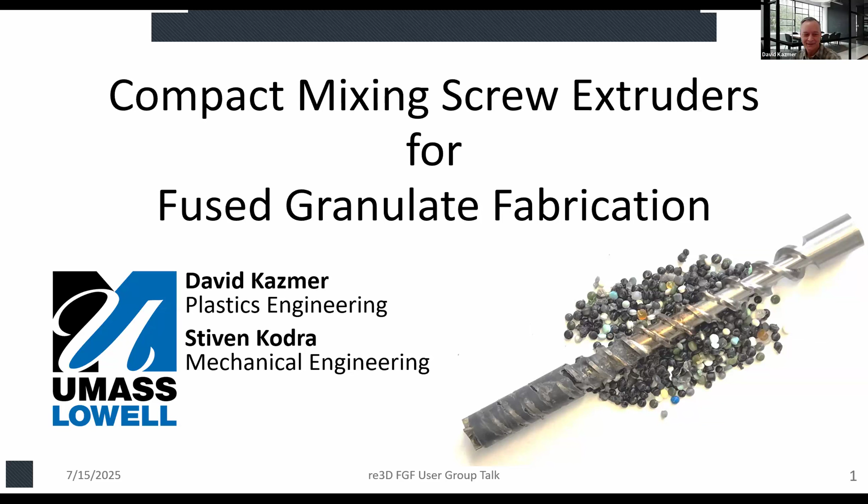All right, let's go on to the next slide. So there's slide numbers. If people want to write down questions, we can reference the slides at the end of the talk. We're going to split the talk in halves, and I'm going to talk about what I've led in the last year, and then Stiven's going to talk about what he's been doing the last 6 or 8 months and going forward. First, I'm going to talk about fused granulate fabrication a little bit and some broad overview of plasticating screws. And then I'll talk about these mixing screws. And that's where Stiven and I are going to switch out. So the next slide then.

All right, so FGF, we know what the strengths are, right? We want it to be cost effective, and there's a rule of thumb in the plastics industry that anytime a person touches a pellet or a material, the price of whatever you're selling needs to double in order to rationalize the fact that you added the value. So pellets are roughly 5 times cheaper than filament, and that's a big motivation. The material variety is also a big deal. There's a lot of pellets available, and the potential to add colorant and do inline compounding with FGF, if we could achieve that, would be a real game changer.

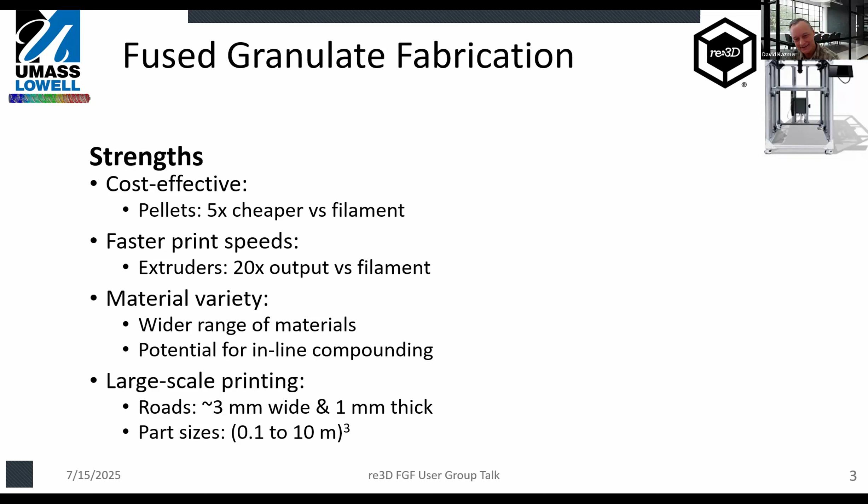Faster print speeds, a big deal, right? Typically we're looking at grams a minute on a fast 3D printer. With FGF, we're looking at kilograms an hour, so tens or hundreds of grams per minute. And then obviously also large scale printing. So the next thing though, the issues, if you can just hit advance. Yeah, these weaknesses. The big one is this lack of output control. How much volume you get out per step of the motor is a big deal.

We need to be able to assure what's the width and thickness of your road as you're extruding and control it well. And then with the extruder, we're also looking at large extruders that might have a slow response and might drool, and all that gives us limited resolution. So what we're seeking to do is address these things by shrinking the size of pellet extruders, right? That's what we're about.

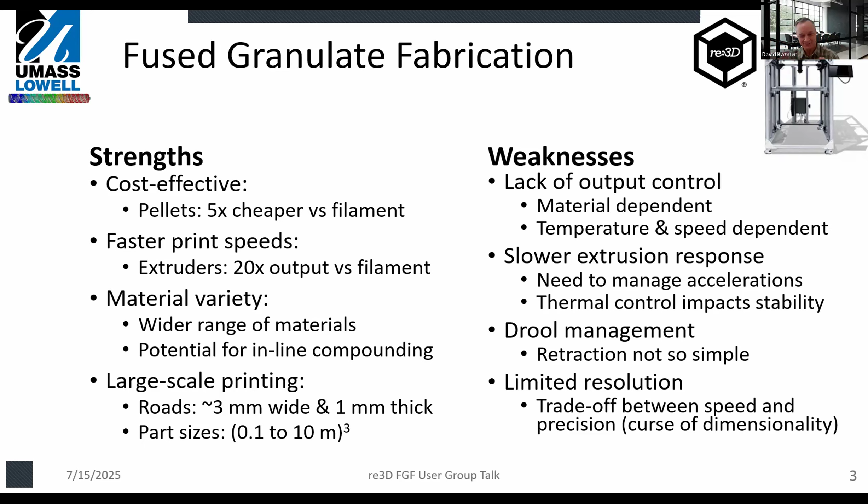And so this is actually very counter to the current trends in the industry. The long-term trend in the industry over the last 30 years is to go to longer and longer screws. About 100 years ago, screws were on the order of 10 to 1 length to diameter ratio, and then they kind of stabilized at 20 to 1 about 20 years ago. And in the last 5, 10 years, they've just gone up to 30 to 1, even 40 to 1 length to diameter ratios. And the reason is that the longer your screw, it turns out you have more residence time. And that allows the melt to really develop, and you have more time to melt, process, and mix everything. And so you can add devolatilizing zones and all these things.

The problem is, as you get longer and longer, you have more and more mass, right? Longer residence times, which actually aren't necessarily good, and your energy efficiency goes down. And so these are really unsuitable for FGF. And what you're looking at here on the bottom, that image is actually a general purpose screw that I designed for a standard extruder that we did a ton of characterization on. So go on to the next slide.

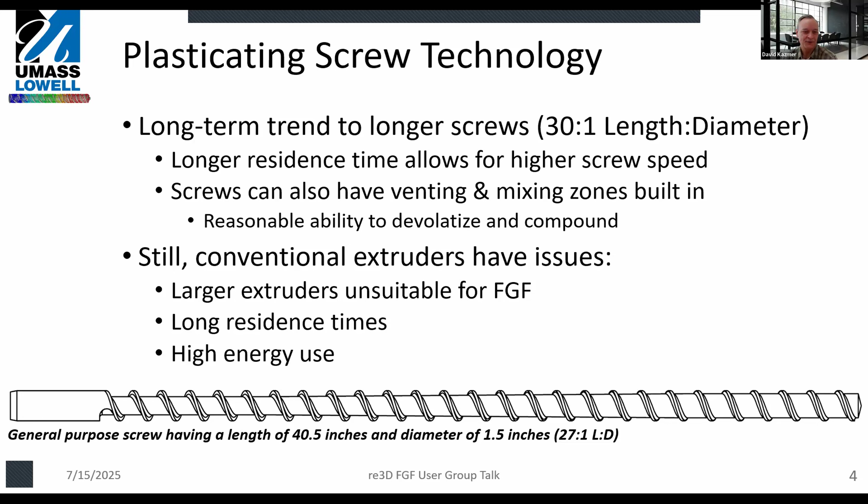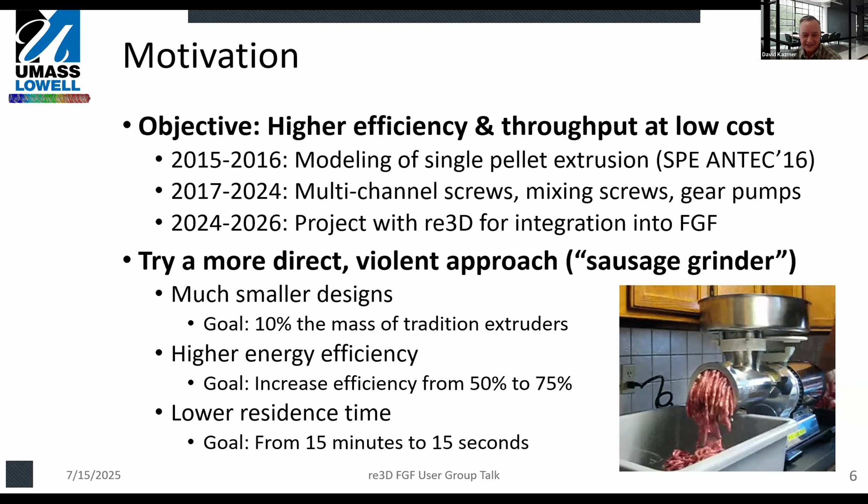At any rate, it's double flighted, and the reason it's double flighted, there's lots of reasons, but the main one is I'm sticking these mixing slots on there. And by having a mixing slot, we're going to cause some of the material to go over the flight and break up the solidified bed in the next flight. And then the reason we have that double flight is the one that follows, it turns out, is going to wipe the barrel. And that function of wiping the barrel is super important, actually, for 2 reasons.

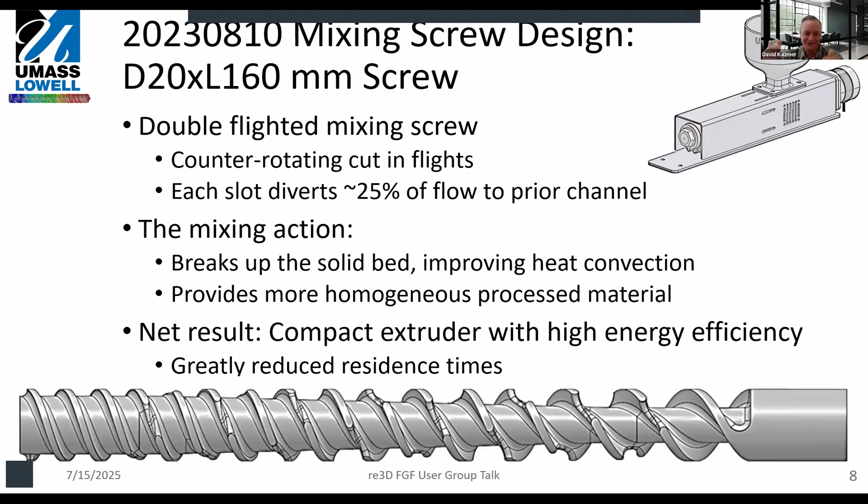One, by wiping the barrel, we avoid residence time and hangups, right? We need everything to be clean. But the other thing is that the material on the barrel is basically melting by conduction. And so by doing this, we're actually getting good activity and lots of shearing between the melt in the channel and the temperature of the barrel. So that's pretty cool. So yeah, we have a very short thing. Let's see if it works, right? So let's go on to the next slide.

So these are just some of the design details. What I've tried to do is design these channels. So it's actually a thing called a variable pitch screw. And what that means is that in the feed section where the channels are deeper, the pitch is actually wider. And then as you go over to the right, where the channels are shallower, the channels are narrower. And the reason is we're maintaining a 4:1 aspect ratio, basically, of the channel width to the channel depth. And in doing that, we're going to have efficient recirculation of the melt, and we avoid these long, slow, solidified beds that will tend to propagate down the screw channel. So yeah, we're all about breaking that up, okay?

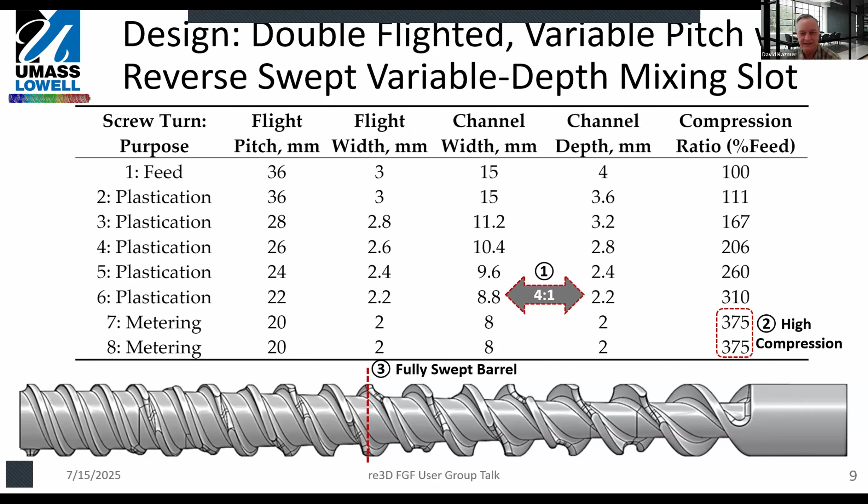And then the other thing we're doing there is high compression, right? So a typical general purpose screw has a compression ratio on the order of 200%, 2:1. This is a 4:1 design, but we are relieving that compression by having these mixing slots. So as the pressure develops and there's too much stress, the pellet's going to want to go back over that flight and work on breaking up the solidified bed. So it's true, by having those mixing slots, we are going to have slightly longer residence time, but we can counteract that easily by increasing the speed of the screw. So it's not about just having so much volume per rotation of the screw, but also enabling that screw to rotate faster. So those are some of the things we're looking at. All right, so the next slide.

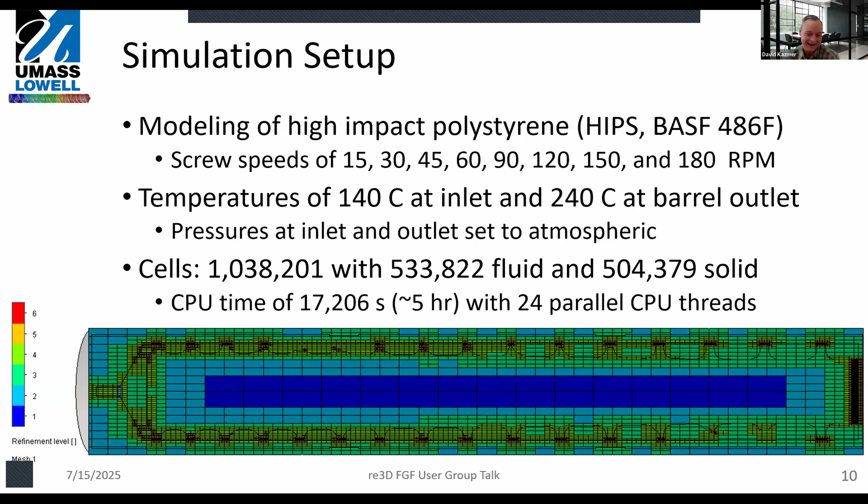So we did modeling, and Steven's done a lot of modeling too, but our current modeling is very similar to this, so we'll just focus on this, which is published. Here we're looking at a cross-section of the geometry, and we're just showing the mesh resolution density across the screw. We can model something on the order of 1 million volume cells. In this case, it's a roughly 50-50 mix between fluid and solid, and it takes about 5 hours on a computer with 24 parallel threads. What we're doing is the inlet's 140 Celsius, and the barrel is set at 240, and we're going to see what the flow rate and temperature are as a function of these different speeds. All right, next slide.

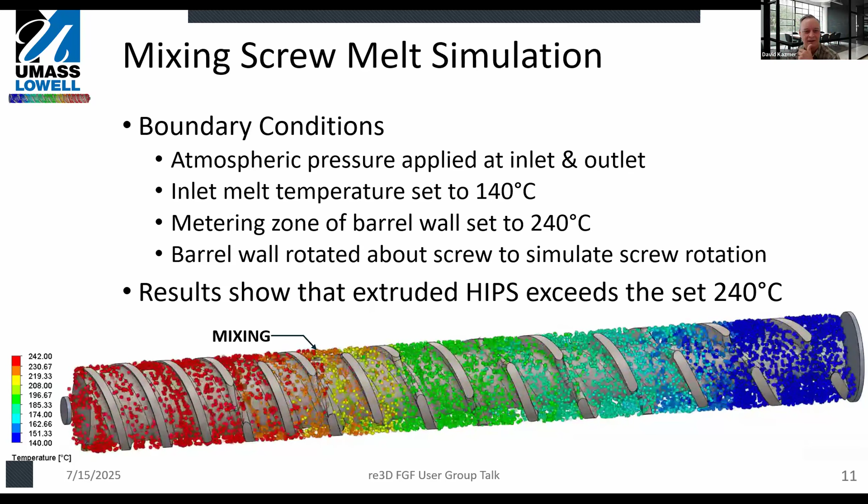And if that cold material were to reach the end of the screw, basically you could be seeing solid pellets and very inconsistent material being extruded from your extruder. In industry, people really run these things fast and hard, and we do see those types of defects, and I've seen it as well. But not here, okay? We're still relatively slow, but things are good for us. You'll see some of the results now.

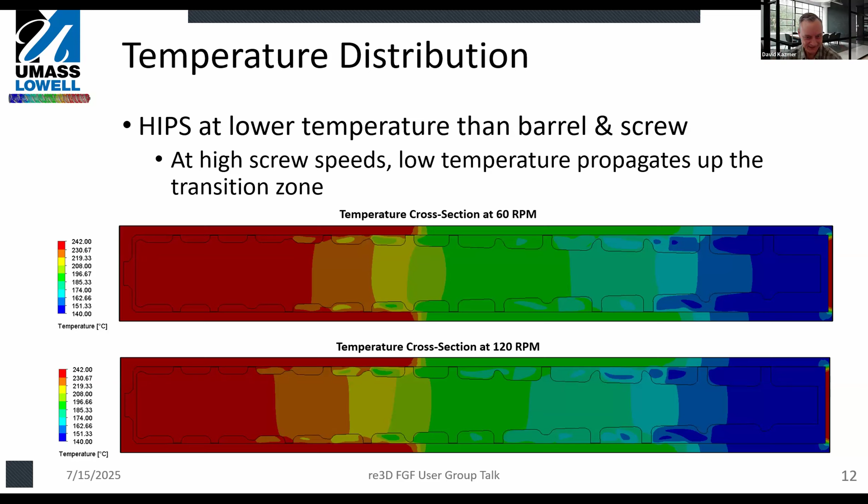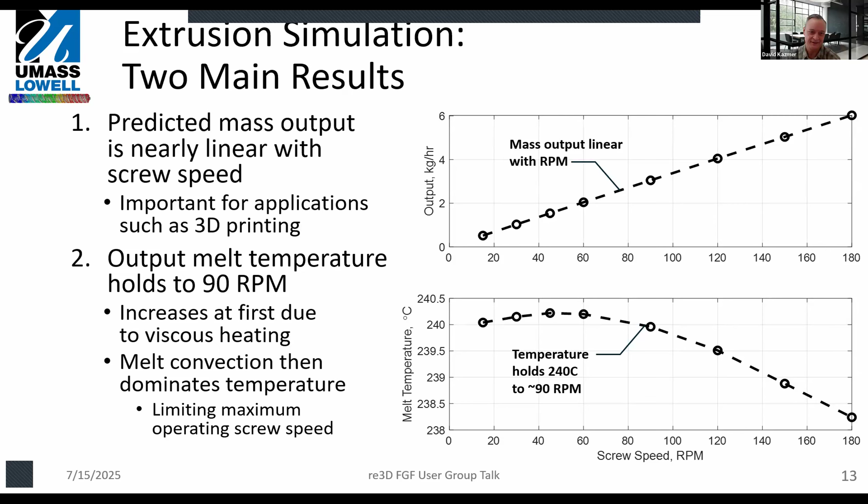And then on the bottom, what we have is the melt temperature as a function of screw speed, and it has this interesting U-shaped behavior where as you start spinning the screw faster, you actually get an increase in melt temperature because of shear heating. And then at some point, you start getting the screw going so fast that the material coming out doesn't have time to heat up. And so the material actually cools down the faster you go. So this really limits the operating rate of your extruder. All right, the next slide.

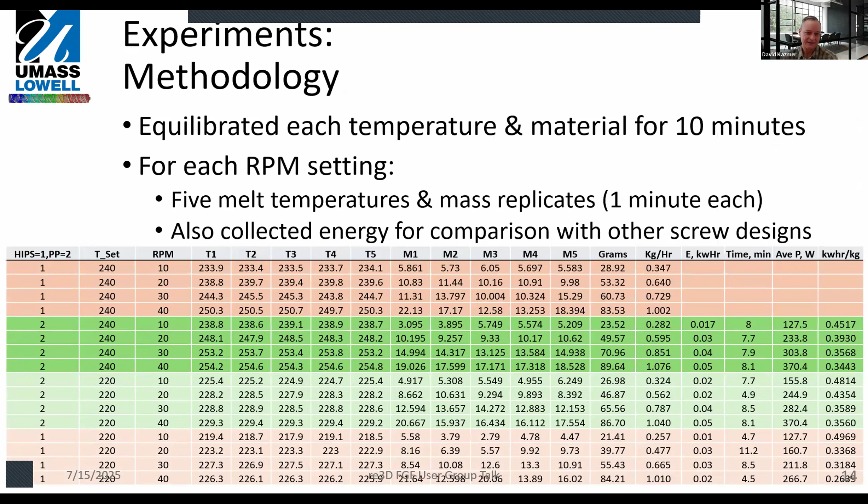So we did a bunch of experiments. Now we're looking at actual quantitative data. What we're doing typically is running high impact polystyrene and then polypropylene in this setup. We're looking at 4 different screw speeds and 2 different temperatures. We're measuring the temperature of the extruder coming out, as well as the mass flow rates. And then we have some plots. I think we have an animation coming up, or a video.

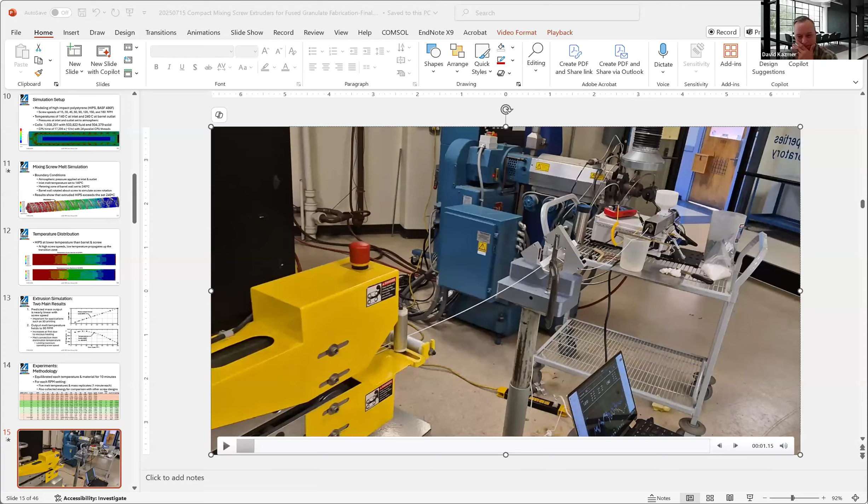Yep, hopefully it'll run. Oh, so Steven, it's not running on ours. It's not running on mine either, yeah. Oh, hold on. Anything? Can you see it on yours? It's not moving on my end. Oh, it's tough. I think that might be an issue. Do I stop the share real quick and I'll start mine? Okay. I'll share just this window. Hopefully you'll be able to see it. Can you see the screen here? Yep. Do people see this, Steven?

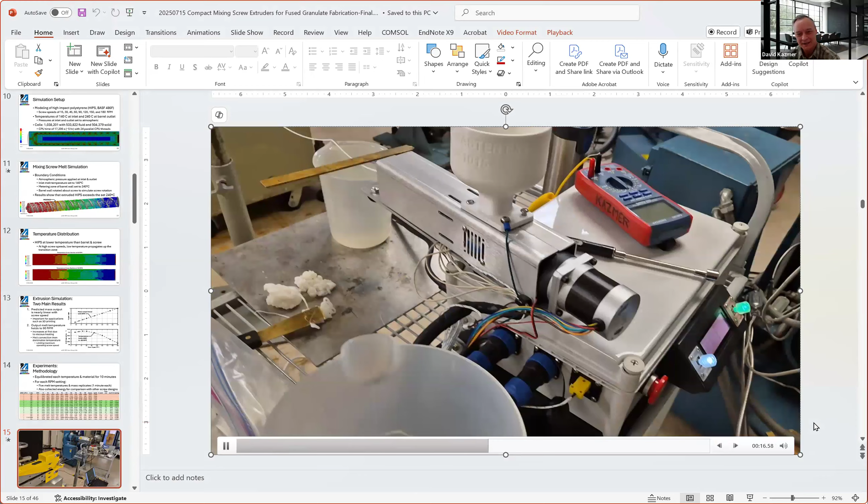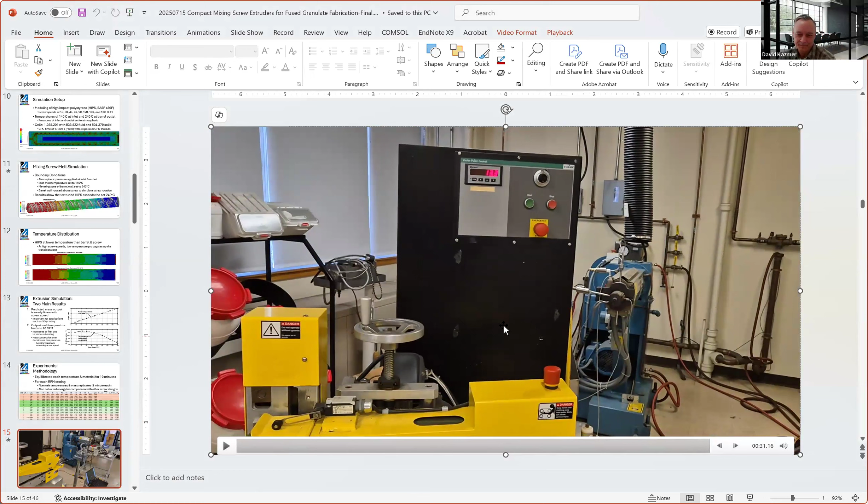Yes. Yeah, so this is a little setup I have here. This is a 20-to-1. We're pulling the material at a couple of feet per minute. It's going through a laser micrometer right here. So this is literally day 1. Those are the takeoff diameters that you'll see there. We'll run one more time. I think it's 13 feet a minute, so it's going pretty quick. And the diameters are on the order of 1.8.

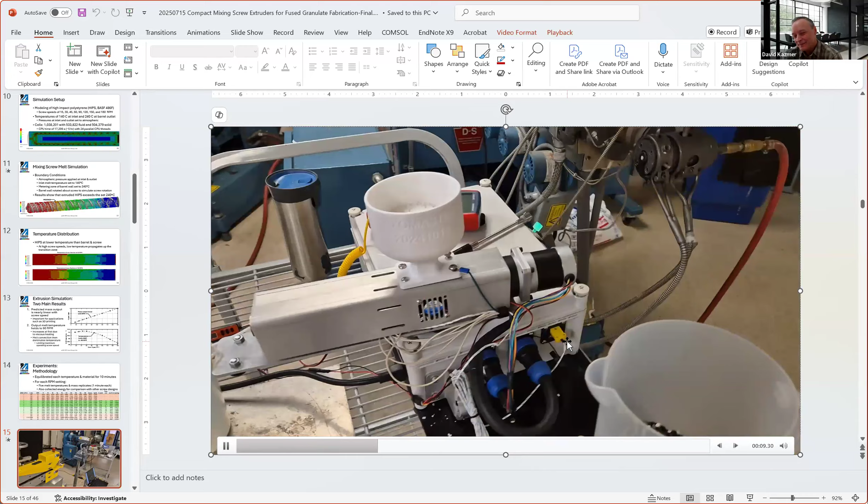Because I didn't actually expect it to work, I just used this clunky water bath. You can see how the water bath has that brass rod there. So you have this stick-slip phenomenon, which is tough, but we are extruding the high impact polystyrene in this case, if people follow that.

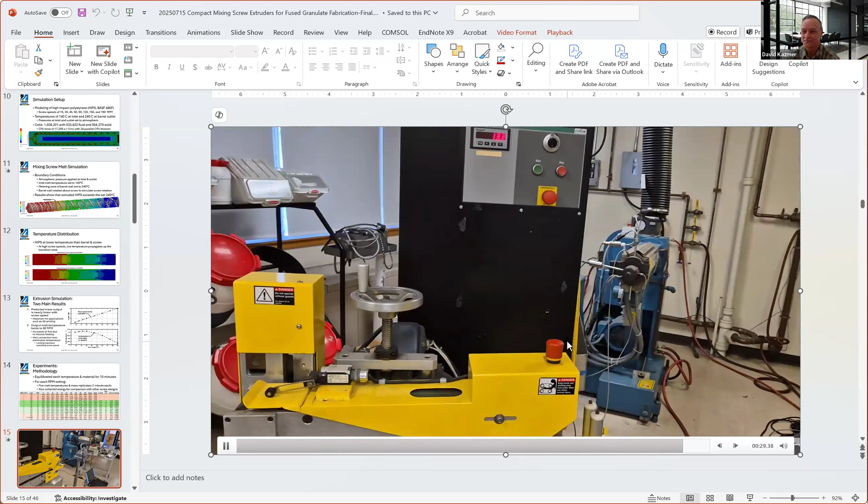So I'll stop my share and then you can pick that up if you want us to restart your share.

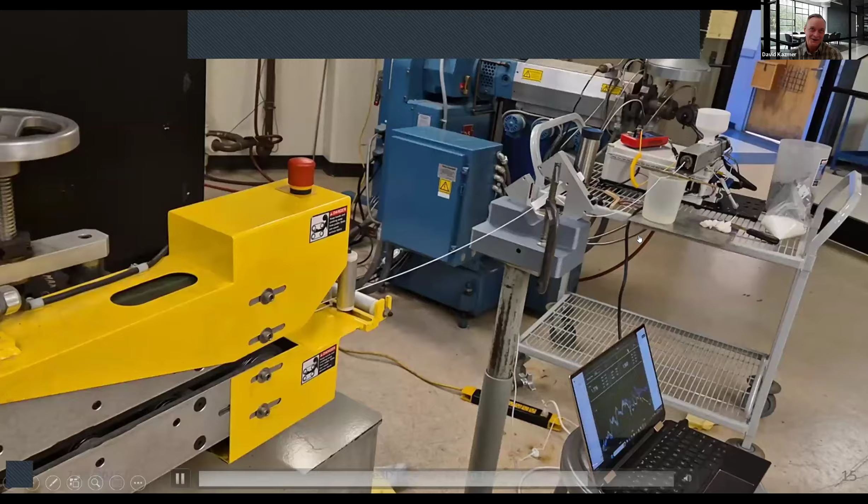So that was the very first day where we ran this thing. And we were pretty excited. And the reason I did all this was I've been working on it for 10 years. And we were entering this project with Re3D, which we're going to talk about in a few minutes in more detail, wanting to de-risk the project. I didn't want to promise stuff that I didn't know we could deliver. So what we have here is

basically a screw pull. And the material that we ran was not only the high impact polystyrene, but also this mixed polypropylene, post-consumer polypropylene. The different colors here actually represent slightly different grades of the polypropylene. And there's also polyethylene contamination in here. So you can imagine that the materials are coming from different sources: carpet, car bumpers, all these different things, plastic chairs. And so what's remarkable is that by the time we come to the end here, you can see how well mixed the material is.

So the melting doesn't really start until about a third down the length of the screw. And so that's all interesting and important. And then the other interesting takeaway is that this is a 20 millimeter screw. Those pellets are actually quite large, on the order of maybe 6 millimeters in diameter. And yet they process pretty well. All right, so I'll start wrapping up my part by looking at some comparative results and then hand it over to Stiven. So the next slide.

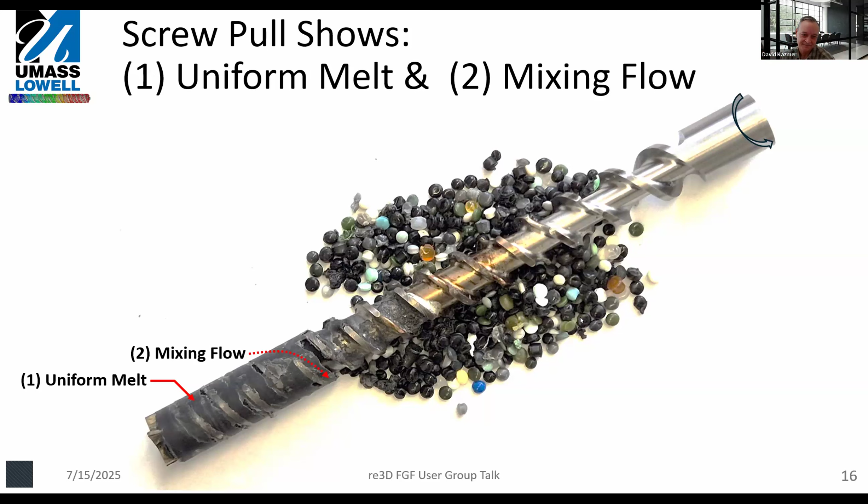All right, so what we're looking at here is comparisons of our experimental data against the simulation results that I showed earlier. And the mass output, the graphs on the right, are really the most important stuff. The words on the left are just support. But the mass output generally is very linear, but we're less than what the simulation predicted. And the main reason for that is because in the simulation, we're predicting a fully dense melt channel, where in reality, in our extruder, you have this compacted bed of pellets, and there's air in there and whatnot. And so the density that's propagating forward with the screw rotation is reduced. So we're about 2/3 of the prediction, which isn't bad.

Then looking at the melt temperature, what's interesting is that we only simulated 240 Celsius. And we did 2 different experimental runs, one at 240 and one at 220. What's interesting here is that when we run 240, you can see that we're actually increasing the temperature quite a bit more than the simulation predicted. And likewise, at 220, you start out slow, it's very close to 220. And as you increase the speed, the melt temperature also increases above the 220 quite a bit. The main takeaway is that this data suggests that we could run faster because we're still well above the target temperature. In our case, though, we had a 50-to-1 gearbox that really limited our speeds to 40 RPM. And so for that reason, we physically, in this setup, couldn't do that. So we didn't go above 40 RPM.

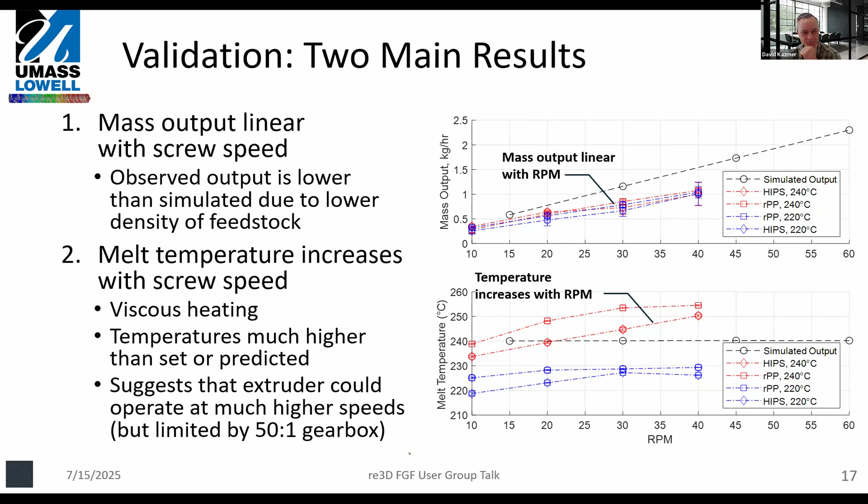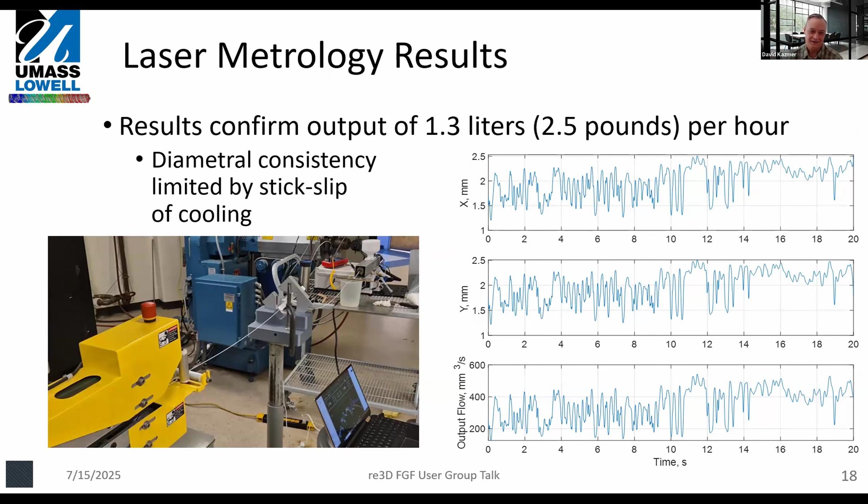All right, I think I have only maybe a couple more slides. What's interesting, looking at the laser metrology results, you can see that there's a lot of variation here down the length. Most of that is really due to the stick slip coming off that brass rod in the water bath. The main takeaway, though, is that we really were around 2 millimeters in diameter. And given the takeoff speed, this confirms that we were about 2.5 pounds an hour on this tiny little extruder, which is pretty cool. Okay, one more slide maybe.

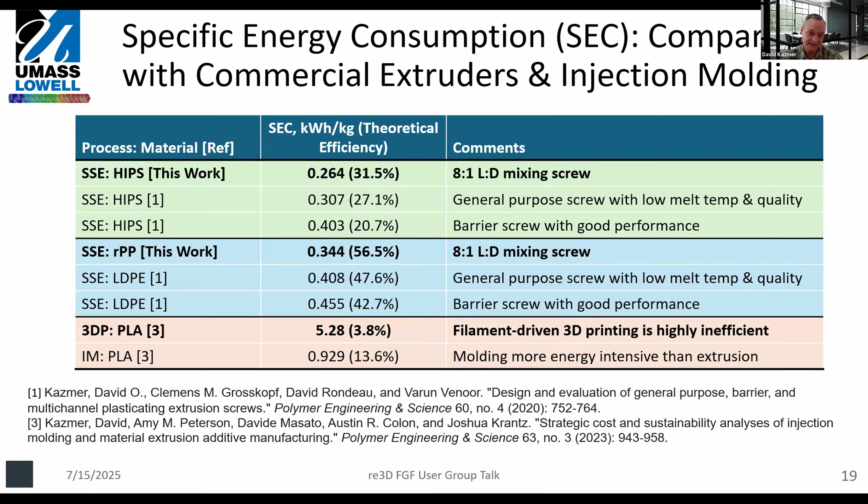We can skip this one. So efficiencies were on the order of 50%, whereas in these large extruders, we're talking industrial scale things, they're closer to about 40%. So that's pretty cool. All right, so this is my very last slide.

So what we found from the preliminary work is that the mixing screw was impressively robust. Even with this recycled polypropylene material, the energy efficiency was great. The residence times were looking good. And so where we're handing it off now is the last 8 months or so, we've been working on scaling it up to the larger size. And then looking at instrumentation, and then also characterizing some stuff on residence time and how the material's melting in the screw. So Stiven's going to talk about this stuff now, and then what our future work is.

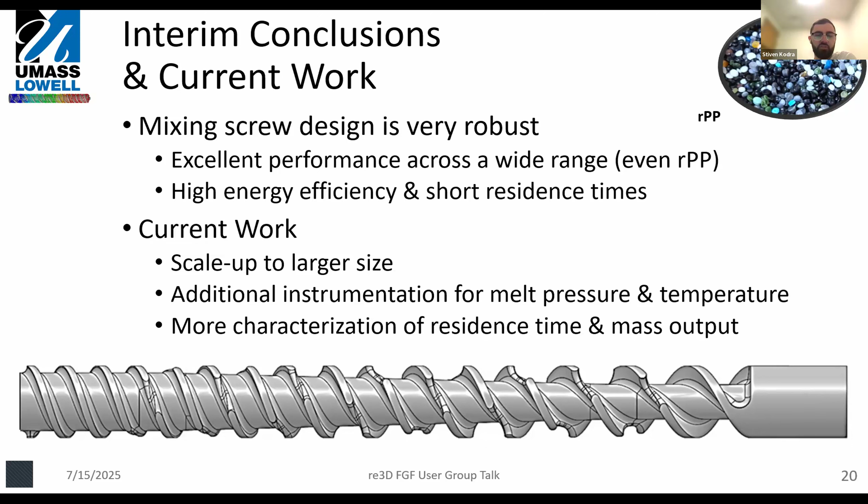Okay. So as Dr. Kazmer mentioned, we essentially took designs and learnings from this screw and applied it to a slightly larger screw. From that 20 millimeter screw that we talked about previously, we sized up to about 31 millimeter diameter. We still kept that 8:1 L to D ratio and took a lot of learnings from the old screw design and applied it here, where we have two feed sections or two turns that are feed sections.

This allows for more constant feeding. And then again, we start that long transition zone where we're constantly increasing the compression ratio each turn of the screw. And again, also incorporating these mixing flight designs that achieve nice flow and mixing within the variable recycled pellets that we see from the processing.

Another upgrade to this larger diameter screw, to get more data, we incorporated an instrumented nozzle into this extruder, which incorporated a pressure transducer up to 20 megapascals, as well as a melt flow thermocouple to get a more accurate reading on the extrudate. Similar to the smaller screw, we ran a total of 5 replicate experiments extruding for a constant amount of time, getting samples every 60 seconds to determine the total mass flow output. This was done with varying screw speeds as well as variable barrel temperatures.

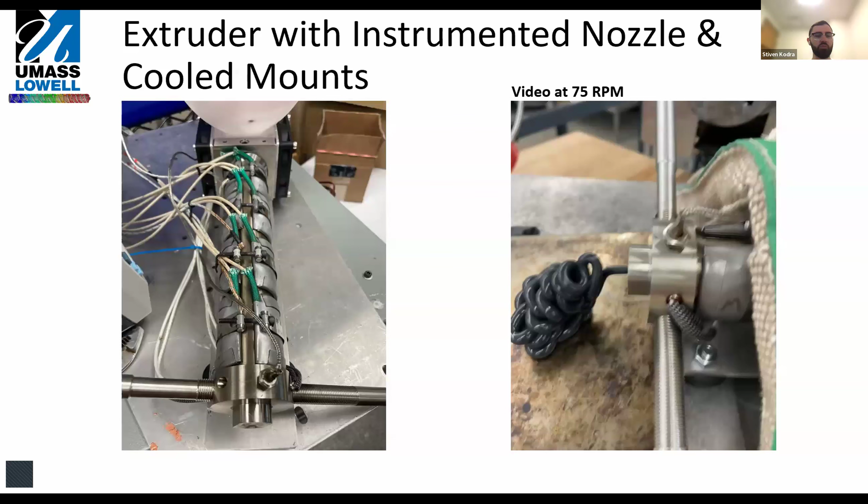So here's a video. A lot of these experiments were run in the horizontal position as shown on the left image here. And this is the extruder setup. We have 4 heater bands on there, and then you can see the instrumented nozzle with both the pressure transducer as well as the melt thermocouple in there. Then here's a video. It's a little loud, but here's a video at 75 RPM. You can see the extrudate just coming out of that nozzle while we were recording some data samples.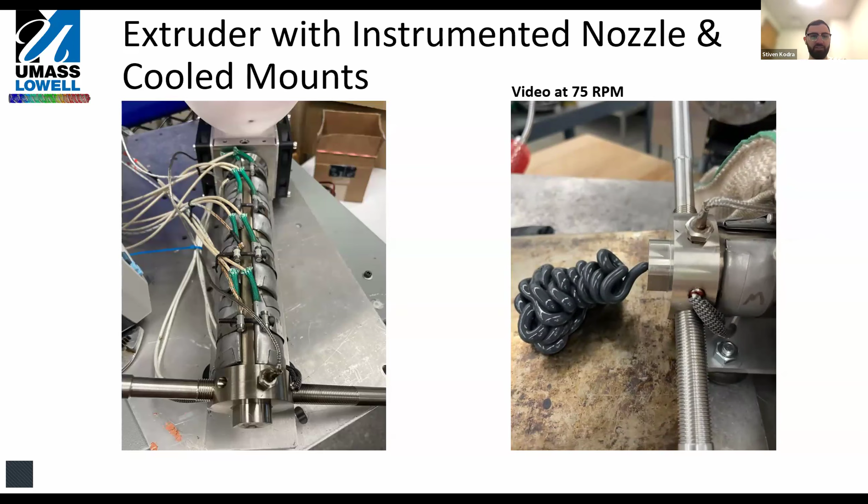You can really see the quite stable pressures pushing that extruded mass out. You do see a little bit of die swell, but that's something that can be characterized. So looking at the data here, we collected 3 charts for each of the experiments run.

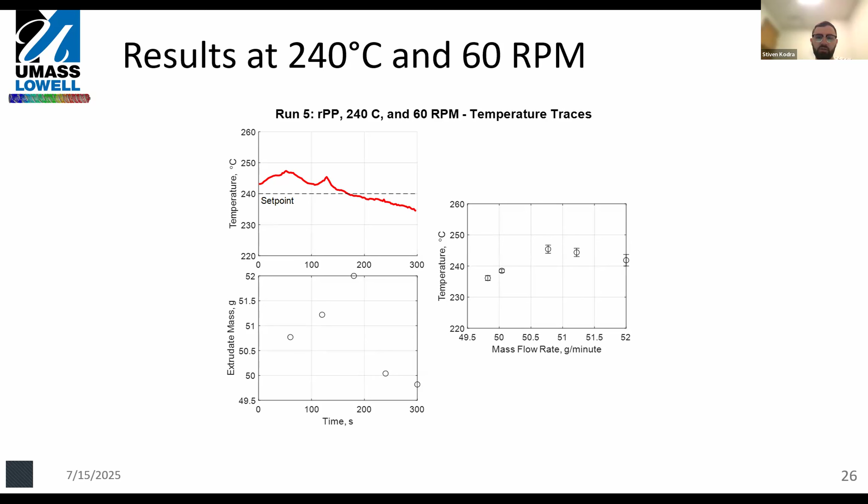And then we looked at variable temperatures as well. So here we went to 240 degrees Celsius, again a uniform temperature across the whole barrel and screw, and an RPM of 60. Again, we see that shear heating at the beginning quite high. The set point was 240, we get to about 245, and then through these continuously long, about 5 to 6 minute tests, we do see a drop off in that temperature just because of the residence time. Again, we see some variability with the extruded mass output over time, but it still hovers around that 50 grams per minute set point.

So with all of this experimental data, we ran some linear regression models looking at the mass output and the effect of screw speed. This linear regression model shows a really strong correlation of the screw speed as a function of mass output. We're seeing about a 0.8 gram increase in extruder output for every increase of 1 RPM. The temperature had a little bit less of an effect, but still counted towards some of this data that we pulled from this regression model.

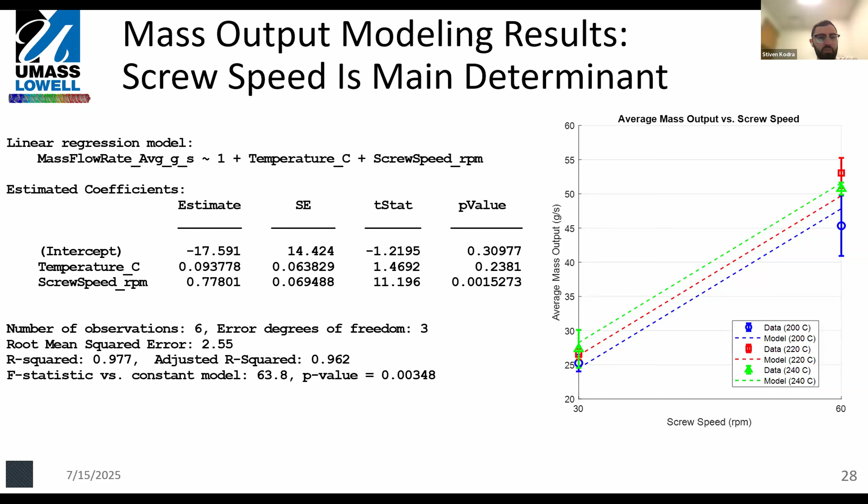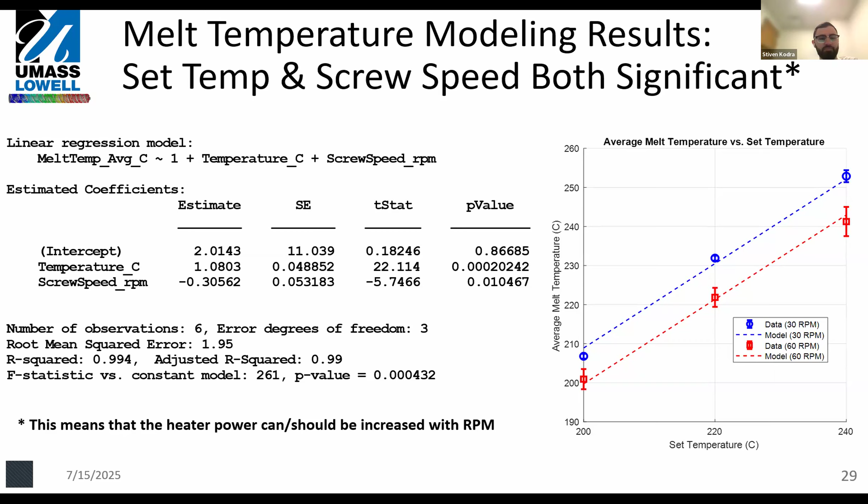Because this application relates to 3D printing, a lot of my experiments were done in the horizontal position, as previously shown. We wanted to make sure that we're not seeing major differences in the orientation of the screw. If you're following pellet extrusion, you've probably seen some of these screw extruders on robot arms moving at various degrees and orientations. So in order to get a rounded data sample, we ran the screw at the horizontal position, and then we ran at 45 as well as 90 degrees.

Here are the results for the 45-degree angle test. This was run at our data center point of 220 degrees Celsius and 30 RPM. And again, we saw a slight increase, but nothing too significant when alternating to the 45-degree angle. Again, the 3 charts here show the melt temperature as well as the extrudate mass over time.

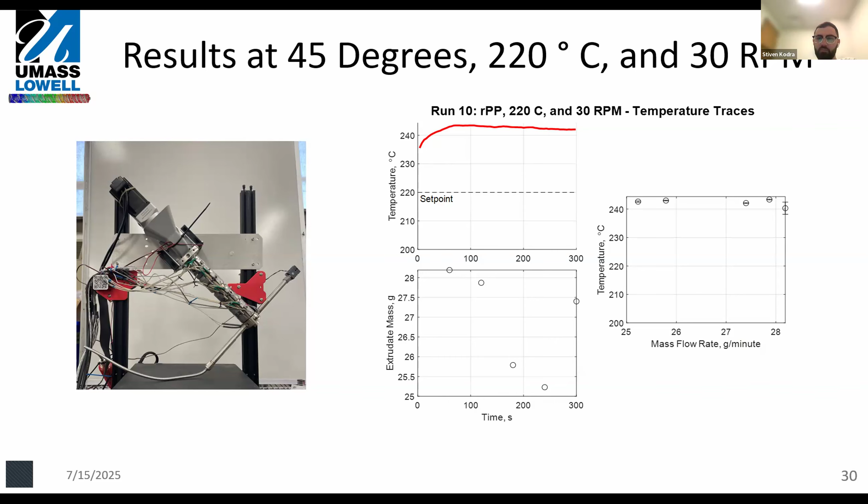Here are the results for the vertical test, 90 degrees, which is the most common setup that I've been seeing. Very stable at that lower speed of 30 RPM. We see very stable extruder melt temperature, and we see a little bit of variation in the extrudate mass, but uniform when we plot it against temperature and the mass flow rate in grams per minute.

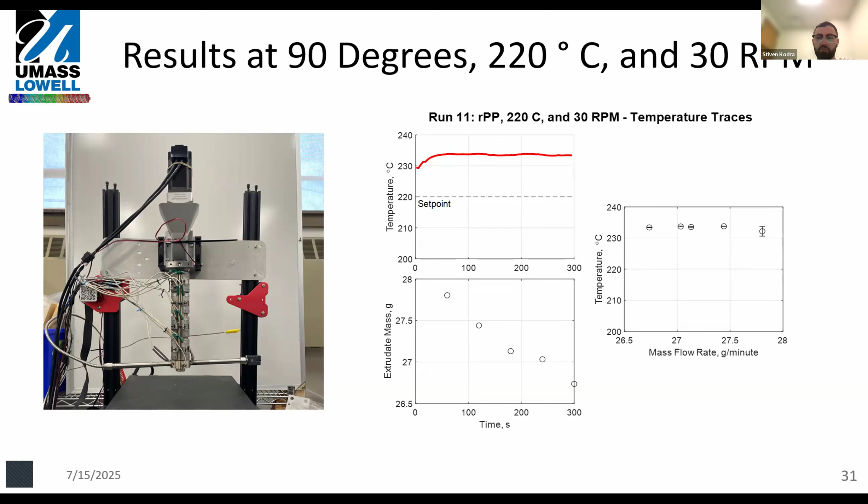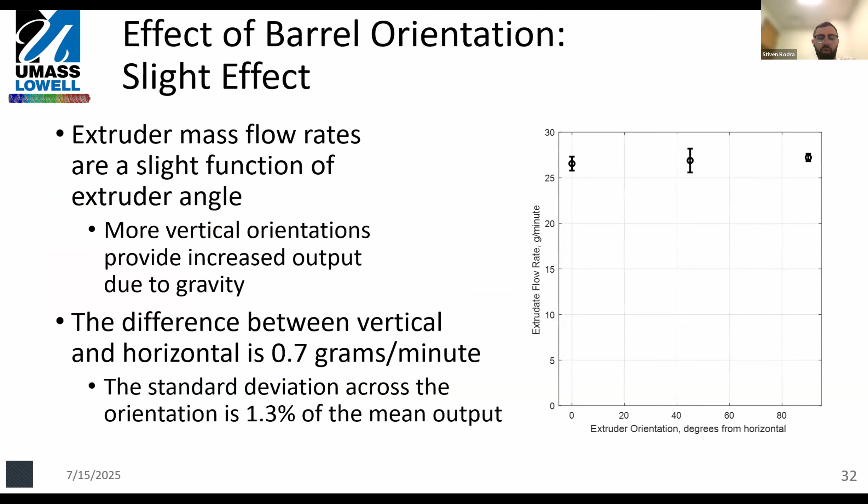So comparing the 3 orientations, we do see a very slight increase of about 0.7 grams a minute when we're operating in the vertical position versus the horizontal position. This can be attributed to varying factors such as feeding in the channels of the screw, as well as how much pellet packing you're getting due to the orientation of the screw.

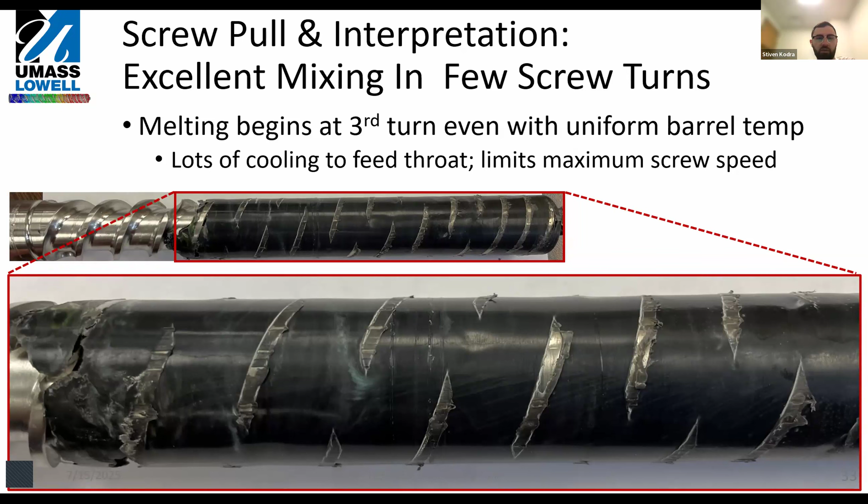So here's a screw pull we did on this larger screw. Hard to tell with most of the material being black, but you do see mixing channels. You see a little bit of blue, highlighted in the bottom image. You can see it being broken up by that mixing slot, and then allowing the backflow for material to be nice and uniformly mixed. We're about 1/3 of the way into the screw, and you can see the material's very well mixed and uniform. And as it continues down to the nozzle, we just get even more mixing.

To highlight this even more, we ran some different material. This is a high-impact polystyrene, and we see that at about the halfway point, this experiment was set up so that I ran white material at the beginning for a couple minutes, and then I threw in a mix of 10% purple into the white material, waited about 20 seconds, and then threw in another batch of material mixed with black and white. The bottom image shows the purple material backflowing almost across a full turn of the screw, again promoting that mixing, which is what we're really aiming for in the screw design.

This is a video, and I put it on the lathe so you can see the full 360 view. Okay, so we've designed and operated the screw, and it's been working pretty well. We have a lot of data on it to characterize it.

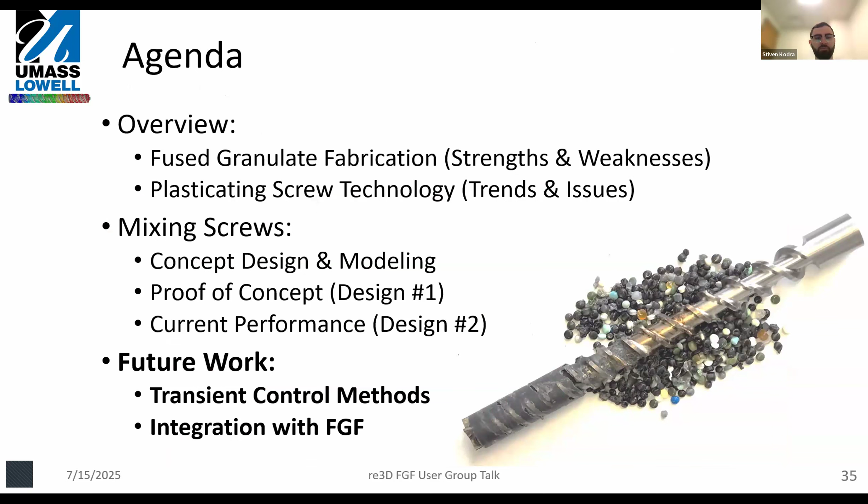And then in our future work, we plan on incorporating some transient controls to help integrate this better into pellet printing. This transient control is very important, especially in 3D printing, unlike traditional single screw extrusion. During the printing process, because we're printing in 2.5D and layer by layer, we see a lot of start-stop cycles, as well as variable printing, such as infill versus printing walls, where you sometimes will use different flow rates and different speeds.

This, again, affects the extruded output. And then during startup and stopping, you see either pressure lag, oozing, or under extrusion, depending on the speeds and how you're operating this extruder or operating your printing. And this contributes to a lot of defects that a lot of people see with even traditional filament printing, but even more highlighted in pellet printing when we're getting into larger sizes.

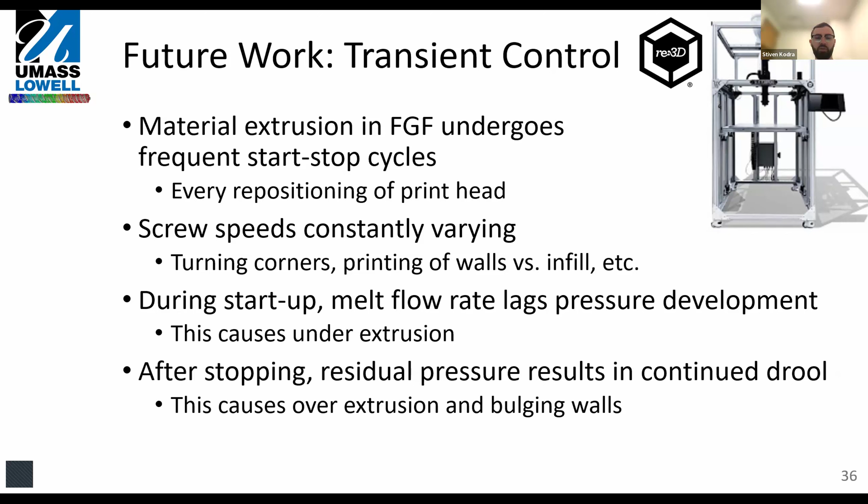So with our screw, we plan on mounting it onto a tiny little desktop 3D printer, the Creality CR-10S. This will allow us to do some transient control testing. So you see a serpentine pattern here where we plan on alternating the screw speeds and moving in certain directions faster. In the X, we'll be limited somewhat by speed, but in the Y, because it's moving independently on this printer, we'll be able to operate the bed quite fast.

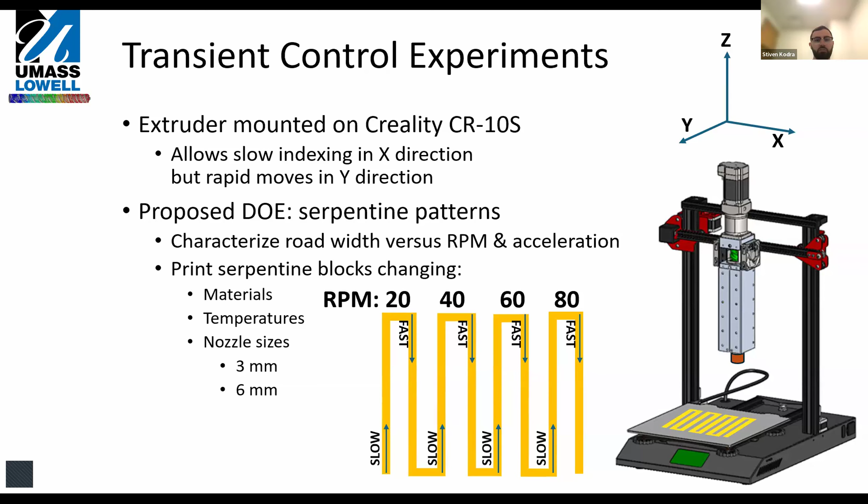By printing these patterns and then characterizing the road width versus the collected data, such as the RPM and temperatures, we'll be able to characterize optimal conditions and the starting and stopping behavior of the screw specifically, in order to account for that. We will be using some system identification transfer functions.

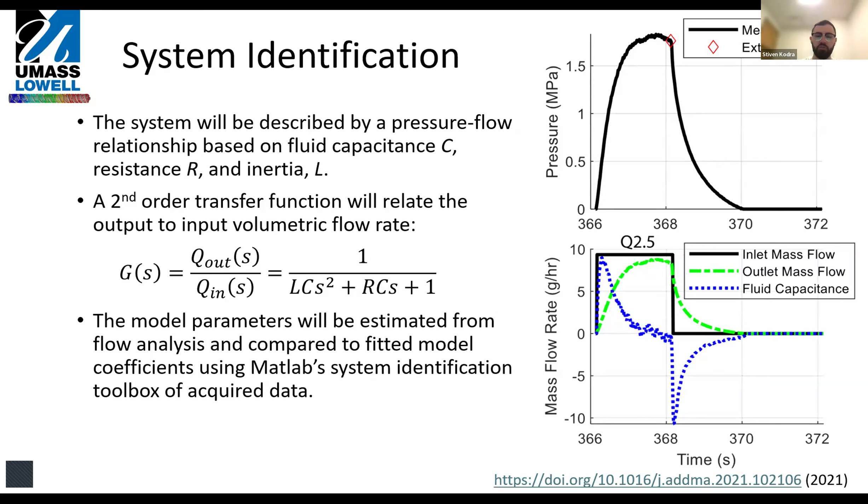As mentioned, when you start the extruder, you see a pressure buildup in that top right-hand graph. And then when you stop the extruder, you see that pressure decreasing slowly. Ideally, what you want is that bottom right graph where you see the inlet mass flow. You want a nice square wave, but in reality, we can't get that because of the behavior of the fluids. So if we want to model this, we can use a transfer function shown here, where we're looking at the fluid capacitance of the polymer flow as well as the resistance and some of the inertia. And this will allow us to incorporate more finely tuned controls when operating these larger pellet printers.

This is used now in, I think, most 3D printing software. It's called linear advance or pressure advance. It's a very simple model. Essentially, you can do some desktop testing to add a little correction factor to your printing. So we want to take this a step further and apply it to pellet-based extrusion, which to our knowledge has not been done yet.

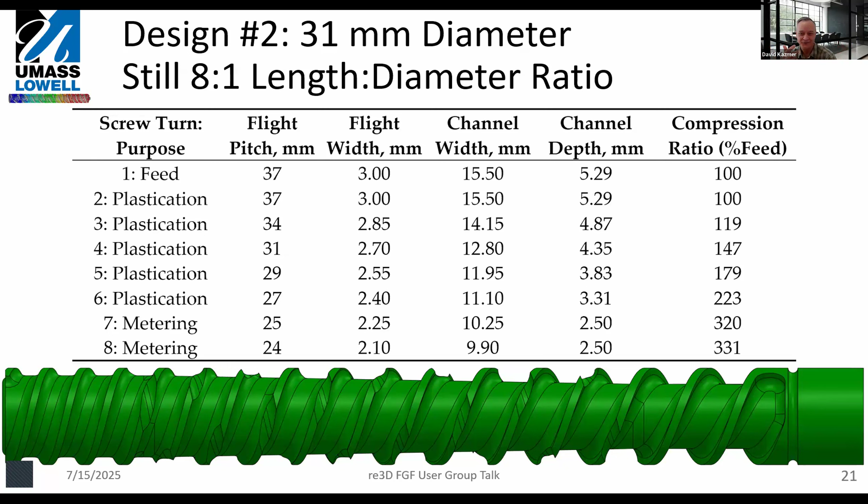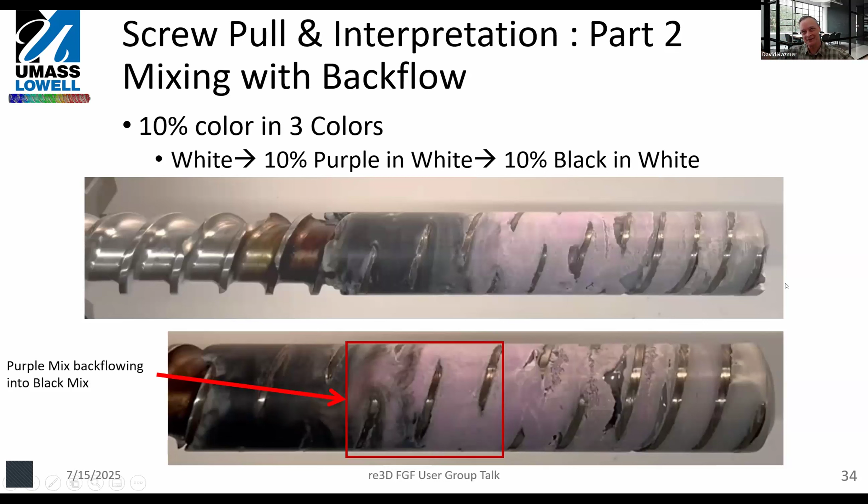What you're looking at is the persistence of the solidified bed, which we're eliminating with those mixing slots. It's based on a lot of theory. By getting rid of the solidified bed, you eliminate the need for heat conduction in the solidified bed, and we're relying on melt convection with the breakup of the solidified bed. The melting rates are much, much faster, like a factor of 8 or 10 to 1. Does that answer your question? Yeah, thank you.

That is super cool and counter to what I thought would happen. Does anyone else have any questions?

Yes, I have a question. I have one. Dr. Great, Moshe, it's so nice to see you. Hey, great job, Professor Kazmer, Stiven.

Very interesting topic, so my question is actually 3 parts. The first part is, you said that it takes 50 seconds for one pellet to melt. I was wondering, is this only for high impact polystyrene, or do other polymer families differ? Also, let's talk about grade. If you use two different grades of, let's say, PP, one meant for extrusion and the other for injection molding, do they still need 50 seconds to melt, less or more?

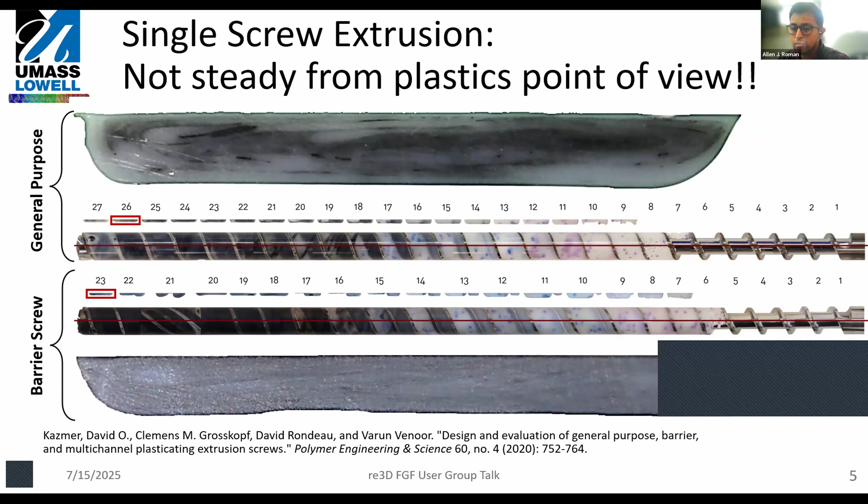Super, super cool work. My question is really, were you able to compare those pressure readings with and without that thermocouple, just because it looks like it protrudes inside of the capillary, which can cause some local disturbances and fluctuate those pressure readings? And if so, did that change your model predictions for your extrusion simulations? Yeah, Stiven, why don't you go to slide 22 and cover this one.

Sure. Yeah, so we did not run it with and without the melt temperature in there. I don't think we'd see much difference, but that is an interesting point and maybe something we could look at down the road. But considering how important we found the melt temperature to be, we didn't really consider running it without that in there. I don't predict any major differences, but I think it'd be interesting to run it to see if we do see anything.

I don't know if Professor Kazmer has anything else to say, but yeah, I'll pile on. So one thing is the melt temperature, the intrusive tip. You actually want to go as far into the melt as you can because you want to reduce the amount of heat conduction being lost to the steel around it. And frankly, I think our signal to noise ratio is pretty good.

One of the frustrations I have in 3D printing in general is the lack of instrumentation. And I've had former students, Austin Colon, who I saw in Austin, he might actually be here, and also another former student, Tim Coogan. We've all looked at pressure sensing in regular 3D printing, and this is, in a way, an extension of that work. So I want to give kudos to that. But certainly, when you see the pressure, it really does vary a lot from one moment to the next, and the flow rates really are varying. And if you're not making adjustments, then your control is limited.